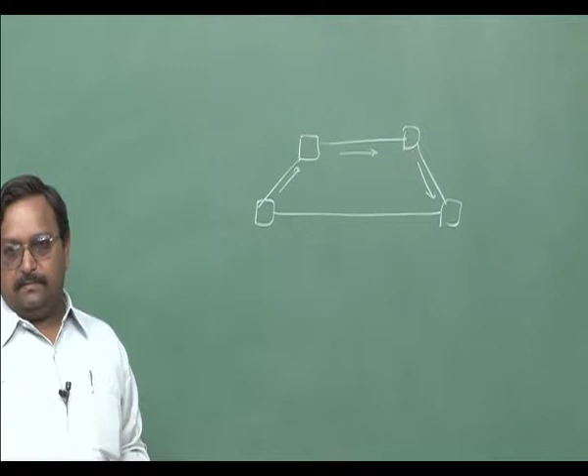So the invite was sent in this direction, and each one of them have added their own via headers. So the first one was added by this, the second one by this, the third one by this. So there were 3 via headers. There is a thumb rule that most of the fields will actually be copied when the response will be generated - most of the fields will be copied back into the response. So this example, I am currently giving an example, later on I will give the specification for the request and response structure itself. There is a formal specification being given.

So usually it will look something like this. This first line in the response will always start with this thing. The first thing will be SIP. Usually it is character case insensitive, but machines are expected to always put capital letters, the way it is done with HTTP also. This is a literal string, it is not a number, while in the HTTP case it is counted as a number, but that does not matter as far as the implementation goes - conceptually that is a difference. They have actually kept a lot of things, borrowed a lot of things from HTTP in this case.

Now there will always be a space, one space, there cannot be 2 spaces. There has to be exactly one space character. So a space character cannot be used inside the strings, that is very important here. If it has to be, it must be escaped.

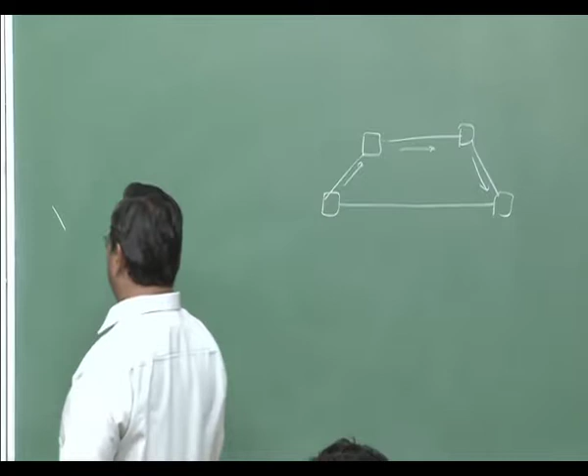Escaping - I think all of you do understand or not. All of you must have used LaTeX at some point of time for your document processing system. So LaTeX has a very nice character, this one, this is a control character. You want to type this character in LaTeX, how will you do that? Is there a way to type this character? How will that be done? Dollars, then here, then dollar - no, dollar is for some mathematical substring. If I want to write an equation, it will go in math mode, it is for that purpose. Suppose I want this string itself to be visible in the text - how will you do that? You are writing a book on LaTeX where you want to explain how to write a math thing. So you have to put this as a character, but the moment you put it, it will write a math equation, A is equal to B plus C, it will write this, it will not write this thing. How will you get these dollars?

You have to use an escaping sequence. So there is a special character which is being defined, which is this. If I put this character just before this, the special meaning of this is lost. This also has a special meaning, so I can also put this. So these are now literal strings. So these two combined together, when they will be passed, you will see something like this.

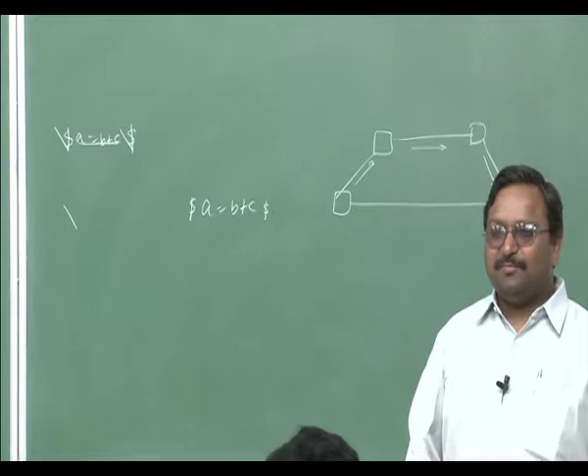This is what is escaping. The problem is when this character itself has to be shown, then I put another backslash, and it removes the special meaning attached with this.

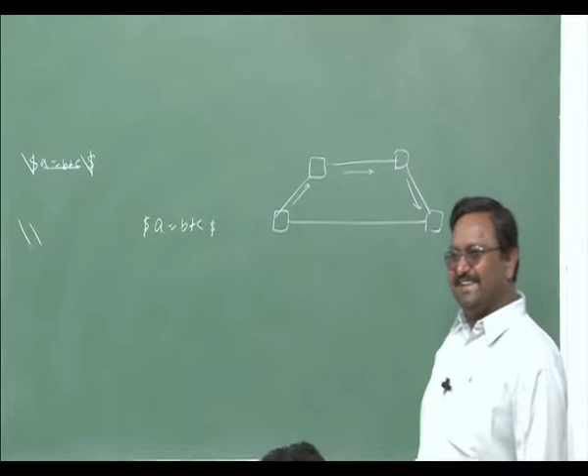This means a new line. No? Yes, sir, this is a new line in case of LaTeX, it's a new line. What you are basically doing is escaping the earlier character, otherwise you cannot print this. I think it's new line. It is not, you check, it is an escaping character, it is not possible. It is being used for that purpose.

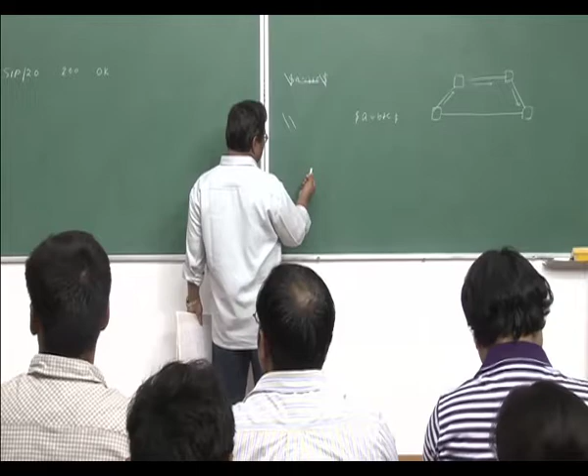Well, a very simple thing: you have math mode, you put something like this, or begin. Begin is typically backslash begin math, something like, yeah, and then... so all these are special characters, they all start with this backslash, that is why it is a special thing, but this itself can be escaped by putting just one backslash before this.

That new line, I think, is used in certain places, I will tell you where, especially if you want to write a text-based configuration file in Unix. So this single backslash is also used for breaking in a physical sense while doing C programming, but actually it is considered as one single line. So one single large line can be broken, and when written into a .txt file, it is written as whatever you are writing, slash, whatever is slash, whatever is slash.

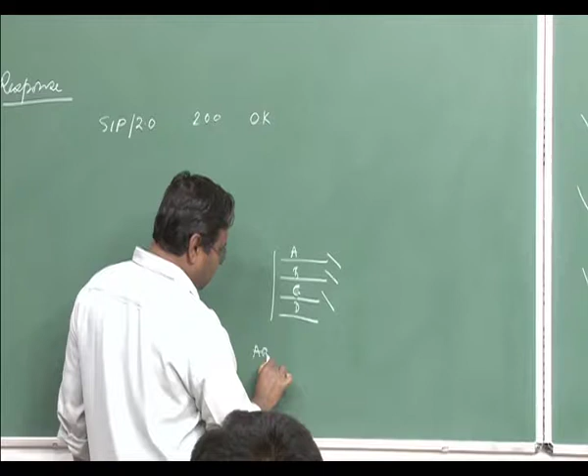Now when the machine is going to parse it, so this is A, B, C, D, it will actually read it as A, B, C, D new line, like this. So sometimes you require this, for example when you are implementing printfs and other things, and lines become too long for the messages, then usually you do it. That is again a common use.

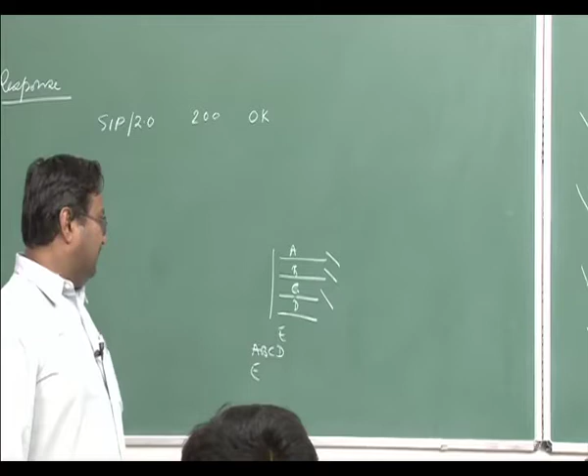Again that is a special character there in this case, but that is within a string. So when you are doing a printf and you have to print this particular thing, then there is again a problem. So you use a printf command and you put this, then there is a problem actually. So if you want to print this itself, you have to again do escaping.

So escaping is a pretty good notion. In fact, in HDLC when I was teaching, I talked about this escaping. So what was that escaping thing which I taught? There should not be continuous ones, because 0, 6 ones and 0 is the start header. 6 continuous ones should not happen inside the string. So I implemented a bit stuffing, that is escaping rule actually. After every 5 ones, I insert a 0. So even if there are only 5 ones in actual data followed by a 0, still I am adding a 0, so that on the receiving side I can simply remove it.

The same rule also applies here. So certain control characters cannot be transmitted in the strings which you are doing, they have to be escaped. Otherwise, you cannot interpret them. This in fact also happens even in your HTTP transport, or in XML schemas, where certain characters actually have a special meaning.

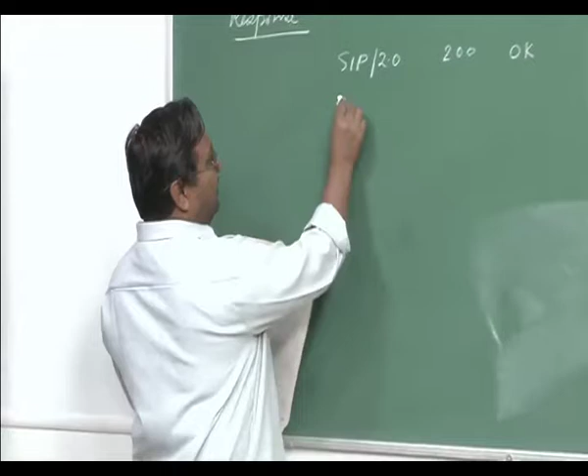So the first field will be this, and as I told you, three guys have already added the via headers, so I am actually putting all three of them.

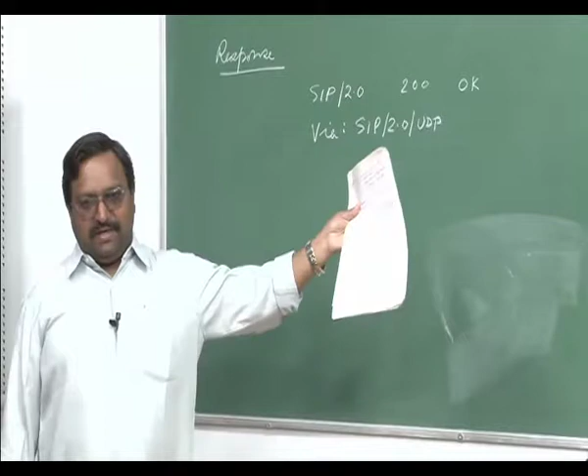Again this header must have a description, as per that format. It says the one to whom you are going to send back the response is a SIP 2.0 compliant proxy. It is going to use a UDP transport, that is what has to be used when communicating back. And the guy who has inserted this, or where you have to send back your response first, is this one.

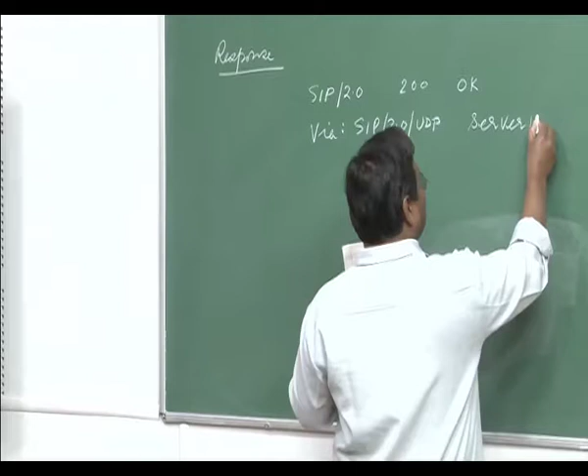So you remember, this one was a SIP server for biloxi.com. So what has been informed to this guy is, when you send the response back, send it to this person, and it actually will remove this particular via field when the response is moved further.

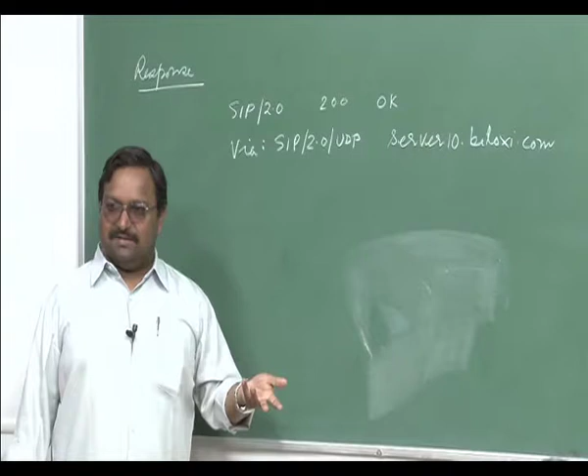This 200 also means okay, so 200 and okay, 200 is for the machine. This is interpreted this way: the first field will always give the version number, it is a fixed format, one single space. This is what will be fed to the machine, or the automata implemented as software or a program, which will understand this and, based on that, the finite state machine will change state. This part is for the humans, the machine will not interpret what is written here.

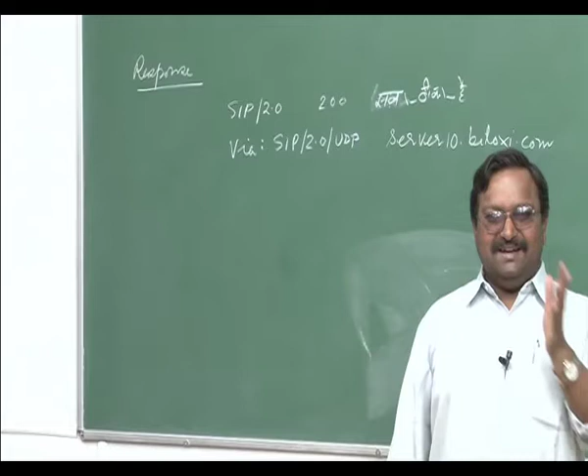You can even write in Hindi if you wish, that is permitted. That is also permitted, remember I have escaped the spaces, and you have to set a header field in this case, which is accept language, colon HN, that is possible. So the machine is not going to read it, so it does not matter.

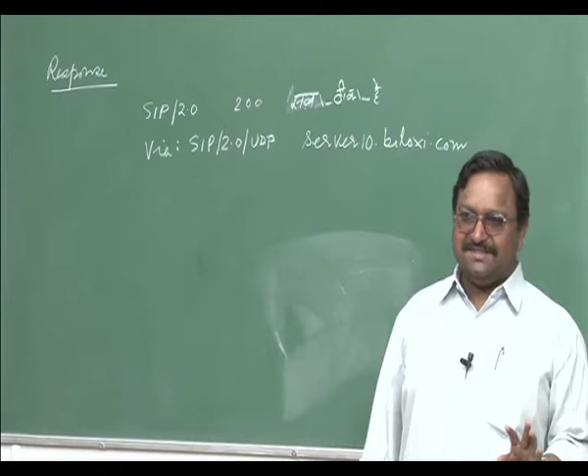For this, it is UTF-8. Remember, all encoding is UTF-8. So any language of the world, almost all languages actually have UTF-8 encodings, which can be used for transactions.

So far I have not seen much of this, except in certain countries where English is not commonly used, they actually do the encoding in their own languages. In India we somehow have been following only English, but Hindi variants might actually exist. SIP servers are not manufactured in India, we mostly build on whatever is open source, and small companies are not focused on the English-Hindi aspect. Most engineers who manage these systems already know English, maybe after 10th class they stopped reading Hindi, and after that everything is in English, but technically the provision has been made.

Basically it is mostly because of China, Japan, Russia, and then of course French and Spanish speaking countries. English is not everywhere, English is not actually a very prominent language, but because the US built most things first, English became prominent. But because it also had to become popular elsewhere, you will always find that everything has two variants, English and French.

Although I think Hindi is the third most speaking, biggest speaking language actually, largest number. Chinese is first, I think, then French or something. French is I think very big, French and English. Hindi comes I think 4th or 5th, somebody was showing me the list, but we still do not have implementations in that.

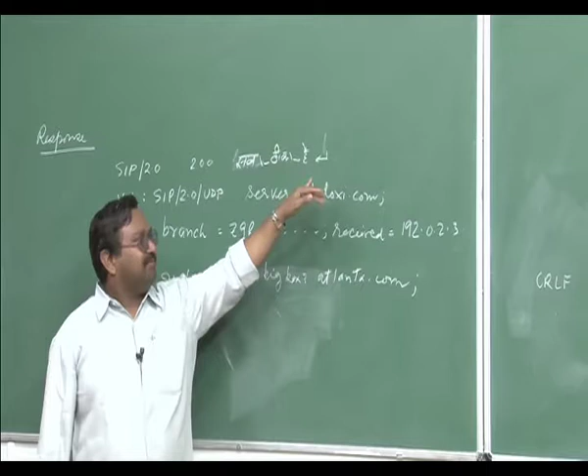Similarly, there will be a third Via field which is added by the sender. This is one single space, not 2 spaces, exactly one space, and that is a specification. The last one will say PC33.atlanta.com. It will also have a branch, some random string, received, and then of course comes the remaining field. So the To field will be copied directly as it is. The To field was, what was it actually earlier? It was Bob, okay.

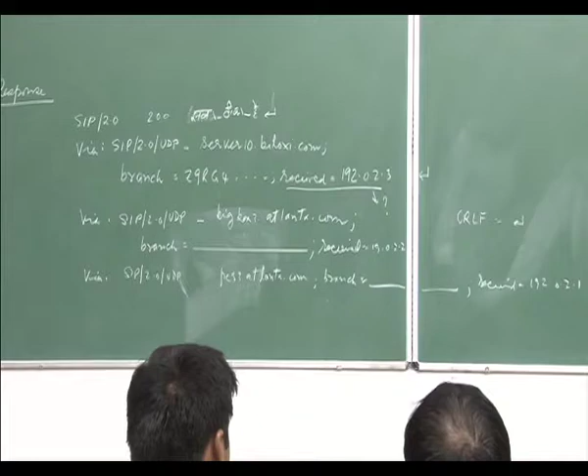So this, I think, whenever I find out, I will tell you, because I don't know how far I will be able to go through the proxy and where it is given. Okay, so let's pick up whatever concept we can pick up. And anyway, if you end up implementing the software, you anyway have to find it out, so you have to read the full RFC and you will find it out. What's the meaning of this? I have not so far reached the specification of via structure.

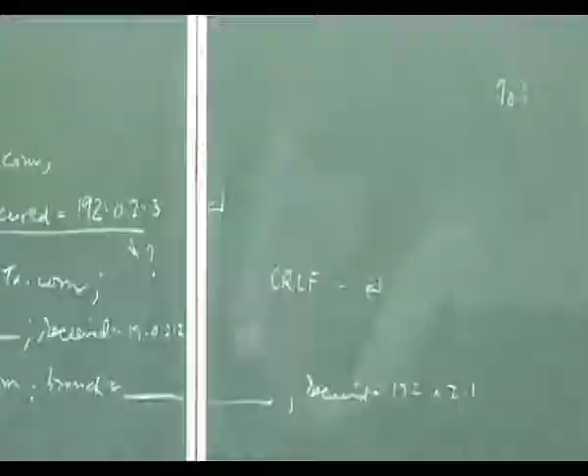Okay, so the field again will contain here, the only difference is rest everything remains same. It's Bob, angled brackets within which your SIP URI will actually be there. Okay, SIP URI also requires all strings to be escaped strings. Angled brackets cannot be used inside the SIP URI, that's very important.

You have to use escaped strings whenever the URI has to be communicated, and you cannot use angled brackets in your email. So for it, I think it's the same way. For example, I cannot have something like this. This email is not permitted because there are angled brackets, since these are usually used to enclose the email ID itself.

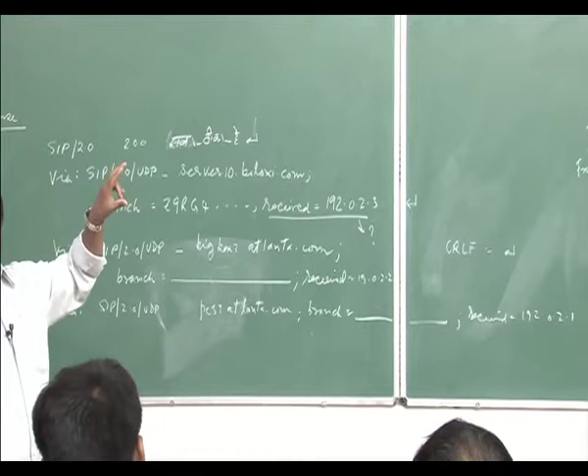Unless record route has also been configured by these SIP proxies. If at any point of time when the invite was sent, one of the proxies says record route and puts its own address there, then that will be maintained at both ends. Bob will maintain it because he receives the invite. The same field will be copied back in the response, so Alice will also receive it. So they both now have to do signaling only through that proxy, because the record route for this particular call dialog has been mentioned in the beginning. Then the bye, when it has to be sent for call termination, has to go through that proxy.

The only problem in that case is if it is a call-stateful proxy, it will not know the status of whether the call is through or not. Usually if it is a call-stateful proxy, these via headers have to be put by call-stateful proxies.

And not a transaction-stateful proxy. Transaction-stateful proxy is a different thing. A transaction happens only between a client and a proxy. So a transaction is happening between these, then another transaction is happening between these.

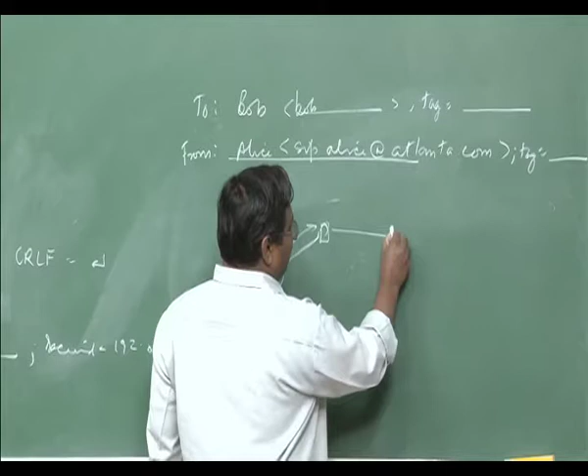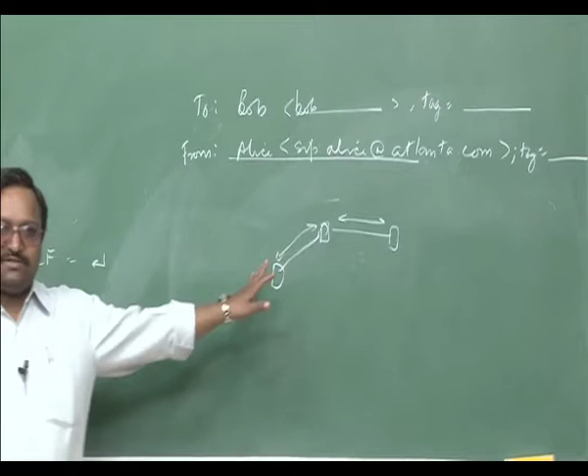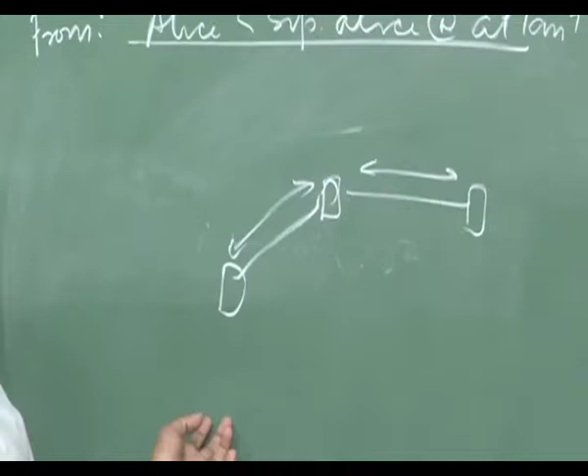Okay, this is a transaction user running here. I'll come to this particular structure. When the response comes back, they keep sending the response back. If it's a stateless proxy, it will not remember anything. Whatever comes is simply forwarded, it does not remember what it has forwarded. When something comes back, it sends it back, that's it. It does only proxying.

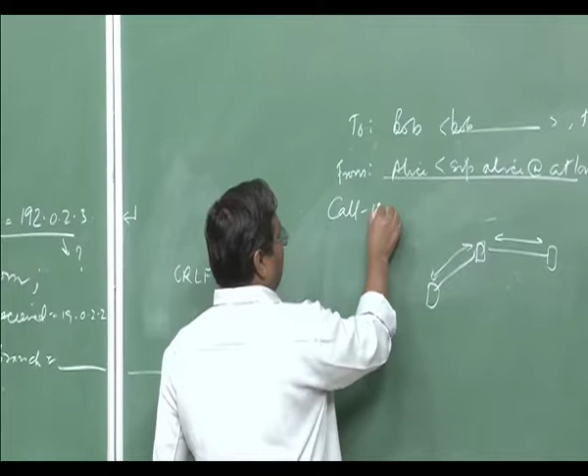So I'll come to the particular figure required to identify this. Then you'll have call ID, this is going to be the same as in the earlier communication, the invite. Remember, this is a response, so there's no method being specified. Then CSeq, this will also be copied from the invite. So there was a method which came, there was a corresponding sequence number. This response is as a result of when that method was executed.

So the sender will be able to figure out the response corresponds to which particular command. When it sends the next command, again the number will change. So if some command gets missed out, it can figure out that it hasn't received the response to this particular command. It got a response for 1, not for 2, but got a response for 3. So it can figure out what commands have not been executed. But all final responses for all commands should arrive back. So this sequence number helps in doing that.

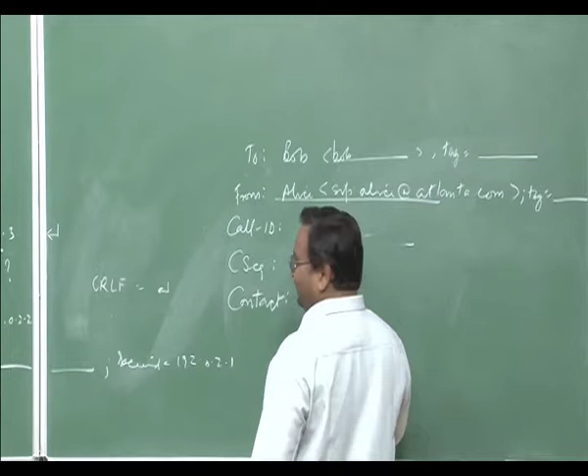And then, of course, this is contact which was not there earlier, this is now what will be added. This will be telling that this Bob, this will not be Bob sip:Bob@biloxi.com. This will be where he is actually currently staying, his current location. This is where the peering will be done.

And interestingly, SIP is not the only URI for telephony. There is a TEL, tel URI, which is also used by a lot of people. So SIP can also be used to carry not only SIP but tel URI as well. But then how those will be interpreted is a different question.

So in this case, 0.2.4, now I think from here I can get it. What has happened is this IP address has to be of the proxy. From here I can guess this is not the one who is giving the answer back. This is for the proxy. So it's only telling that when I received the packet, I received it from this particular IP address, when it's sending the response back. And it's responding back to whatever IP address will be resolved from here.

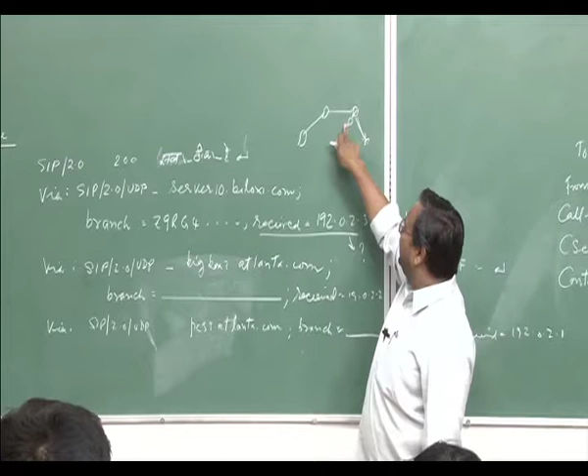So it's technically possible that there's another machine running here. So the invite comes in, this invite was received from here, and this has put a via entry for this particular one, another machine sitting in the same domain. So it will send the entry here, response will be sent here, a different machine, because when the via entry was done - server 10, server 1, server 2, server 3, server 9, server 10 - the invite was received from this IP address, but the response has to go back to this. That's what it actually means.

And this same thing is being copied back, this is a copied back stuff, remember. Only this thing was added depending on from where you received the invite request. I think that's what the interpretation should be, there cannot be anything else now. Again, my interpretation is that only to avoid the lookup, they are adding the IP address, because if that has to be done, then even this is not required.

You just put the via field, then it should be there, because if you remove this server proxy, again you're not giving the IP address. So what path do you have to do? Again you have to look up from the DNS. You look up, but to avoid that lookup, you can put the IP address. That's the only reason I can figure out.

But then in that case, why did this need to be added back? That's the question. This guy who is sending the response back already knows from which IP address I got it. This IP address is of no use to this guy. No, this guy will send to this proxy and then will remove this. But why does this need to be added? Only for Bob - Bob has already, when he got the invite, at that time he knows what is the IP address. When you're sending these messages for this guy, it's a response.

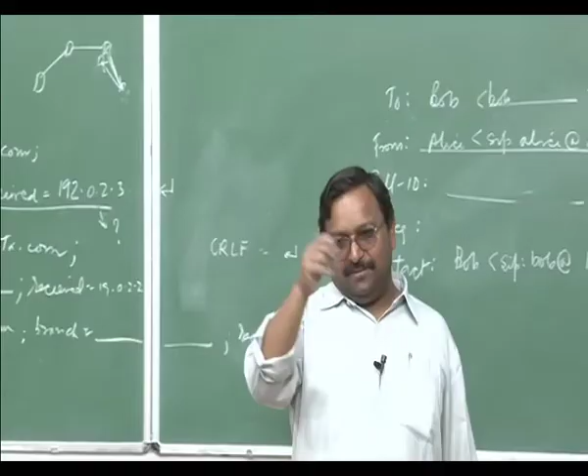And when proxy is sending, this must be this IP address. IP address they have just put it, it's actually 192.0.2.1, 0.2, 0.3, 0.4. That's what must have been done in the RFC. Even these namings are also so that people can understand. They should not misunderstand this stuff. They can make out lot of things through this mechanism. So I think this must be the reason.

Okay. So this is the fourth IP address, which now even clarifies that. This is the contact. Now pc33.atlanta.com corresponds to 192.0.2.1, which is this particular client, where Alice is there.

And then of course I think rest is all straightforward. Contact type, this dot 4 is of Alice, sir. Dot 4 is for Bob.

Which one? So this Alice contact is not being copied here. Alice contact came from that side. Yes, 2.4 Alice's contact comes from the different side. Remember, so this 2.4 is of Bob, is for Bob. It's a contact of the guy who is sending the response. That was the contact of the person who sent the request.

Okay, this to and from field is not for the response, because the response is not going back to Bob, and it is not from Alice. So that can also be one of the confusion.

This talks about the invite message. This is corresponding to the invite which was sent from Alice to Bob. Yes, response to this, and this specific response is originating from this contact. So contact is the one from where the things are originating. 200 is also specific, that it is a response to that. Yes.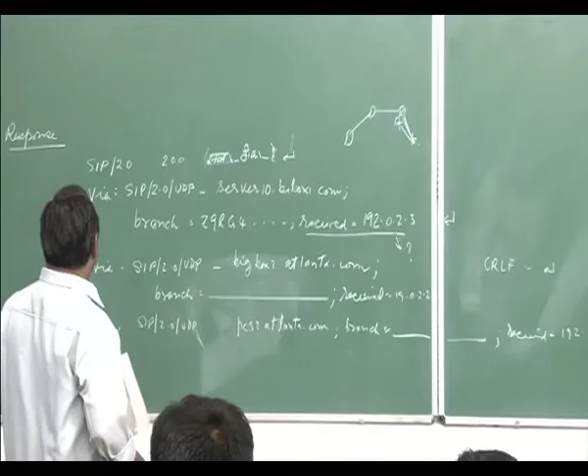You can try this for HTTP, I think it should be possible for this too. Do a telnet to port number 80 of a web server, do not do SSH. Telnet, and do not give a username, it need not be given. Telnet to a machine on port 80, you can even specify the port where the telnet has to be done. By default I think it is 23 for telnet, FTP is 21. Most people do not know that they can change the port. So they do telnet space and the machine where they want to login, but telnet is not a secure protocol, it is a clear text transport, and then you can specify port number 80.

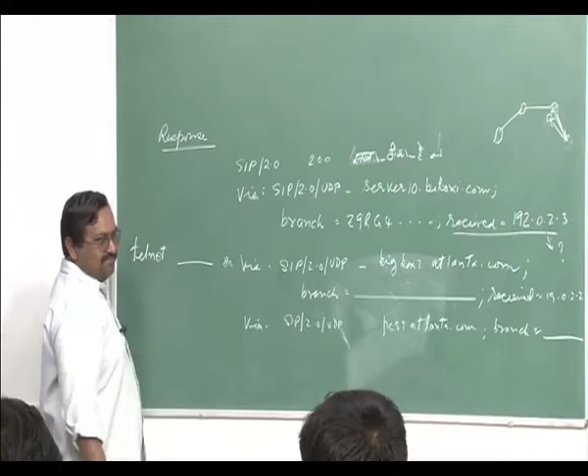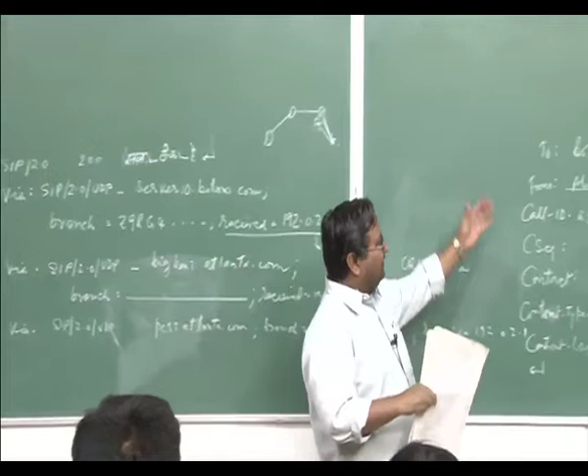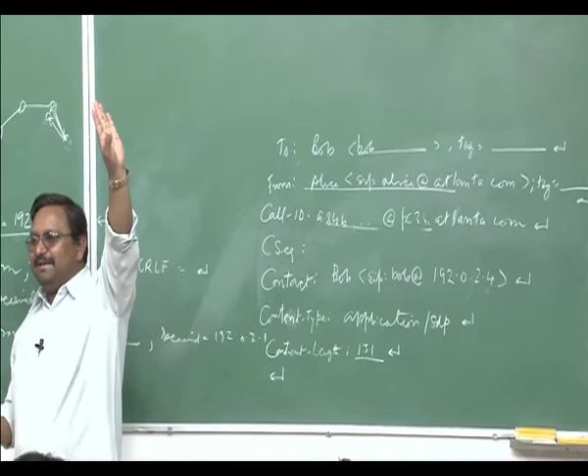So you do a telnet to a proxy, a TCP connection will be set up, and it will not ask for login password because there is no challenge in that. It is not a telnet server running on the other side, there is no telnet daemon on port 80, it is a web server, mostly Apache or maybe something else. Then you will see suddenly a line, and you will write GET, whatever is the first command, you just type it out, nothing will happen once you press enter. You have to write down all the header fields, and only when that final enter is made will the header be interpreted by the machine on the other end.

Because what is happening is, technically for HTTP I am creating a byte pipe, which is a TCP connection between two machines. As you are pressing characters, there is an algorithm used to keep waiting for a certain number of characters, then it will be put in the frame and transported. This will keep receiving characters, but will not start interpreting until it finds two CRLFs together. When it figures out there are two CRLF fields together, the header is finished, now let it parse it, and after parsing it will figure out how many characters it is supposed to receive after this, then it will keep receiving those bytes, and then the HTTP request is all over.

Because mostly HTTP is now using persistent connections, the same TCP connection can be used for another HTTP request. In earlier days of HTTP, for every HTTP request there was a separate TCP connection, response comes back, TCP connection closed, and for the next one you do the same thing again. So persistency was implemented later on. It becomes pretty fast, you only have to do the TCP connection once, so that overhead was actually removed.

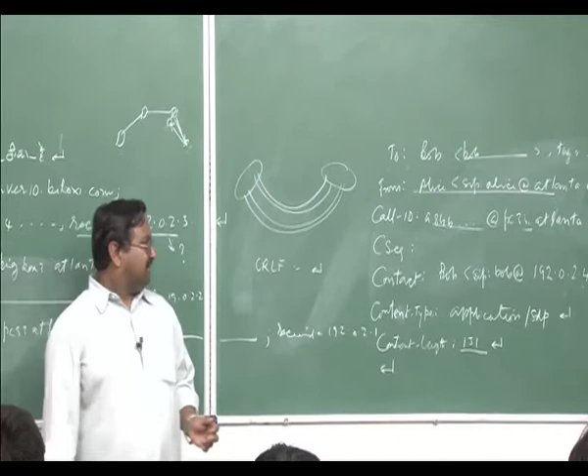So the same concept is also used here. This 131 is the SDP length, the length of the content which will start from this line onward. If it is 0, there is nothing after this, this is the end. There is no end of file character in your Linux systems, mostly it is based on Linux, so there is no end of file character. Microsoft's earlier file systems, I think, were actually using an end of file character at the end of the file. Here, purely it is based on how many bytes have to be read from the beginning, so it will read those many bytes and the file is over. So structurally it is the same actually.

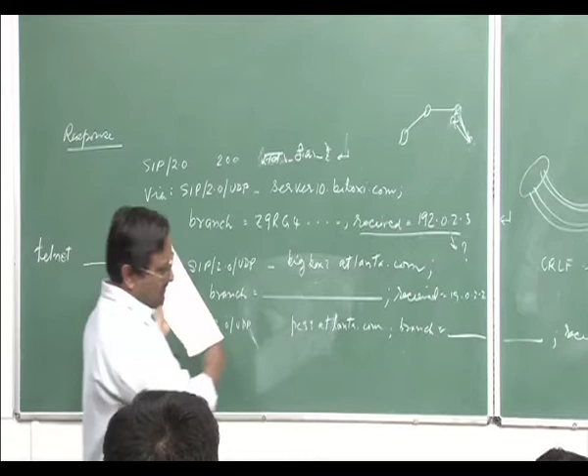So this is what will be typically the response. Let me quickly go through the complete transaction. For example, now what can happen is this guy is sending... first there was 100 which was coming, trying, this also will receive 100. So when the invite was sent, this can actually send something like 486 also. I am just giving an example, it means busy here.

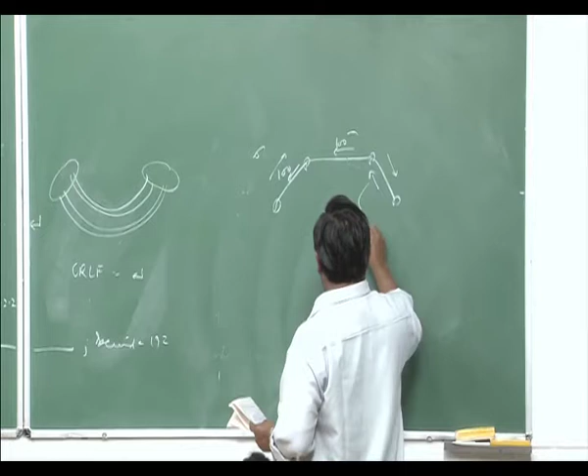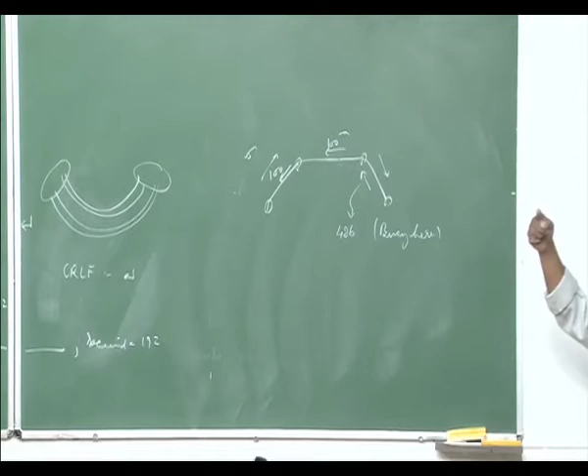This is one of the codes. I will specify which particular 1xx is for, 2xx for what, 3xx for what.

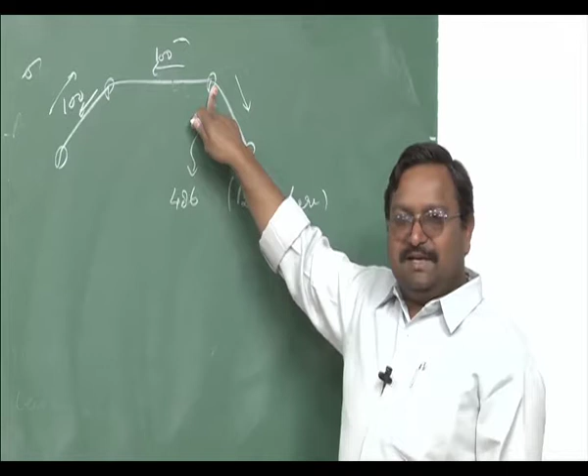Now, this 486 is not received by this person, this is sent by Bob, because Bob may be talking to somebody. In that case, this proxy can decide that I can now try making a call to a voicemail box. So this will typically be used for those kind of applications.

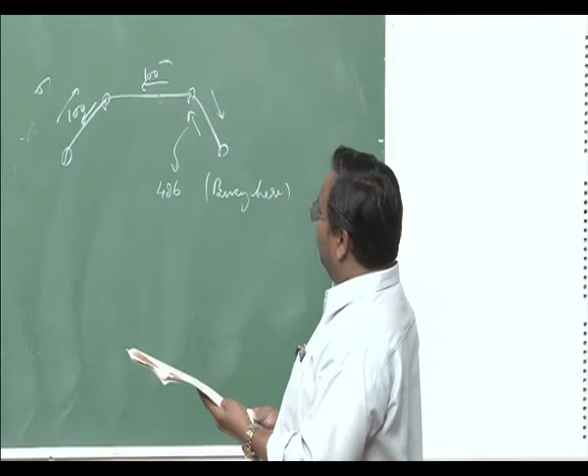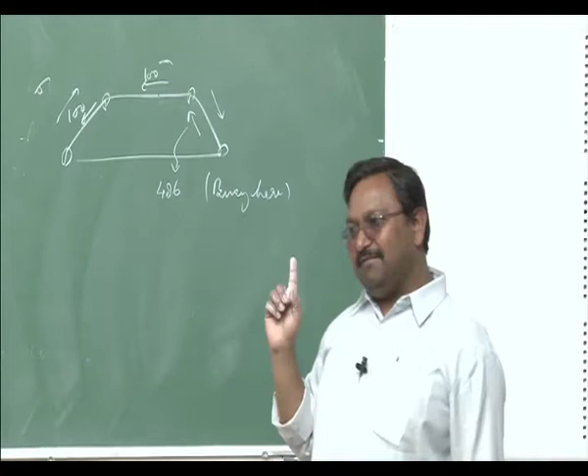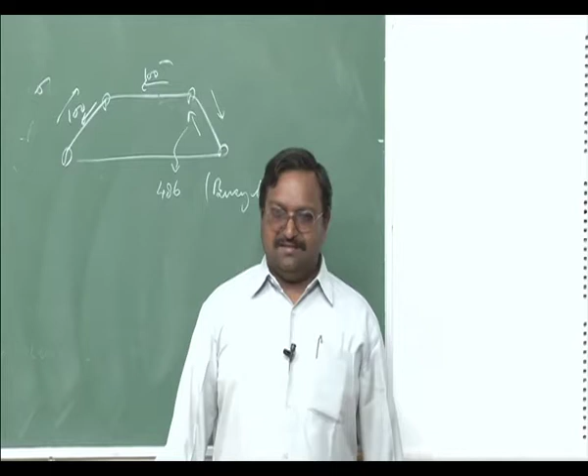And this new invite need not be sent via proxies, this can be peer to peer, that is important, unless that record route thing is being configured in the beginning. And then of course, it can send 488 which is not acceptable, that is what is the meaning.

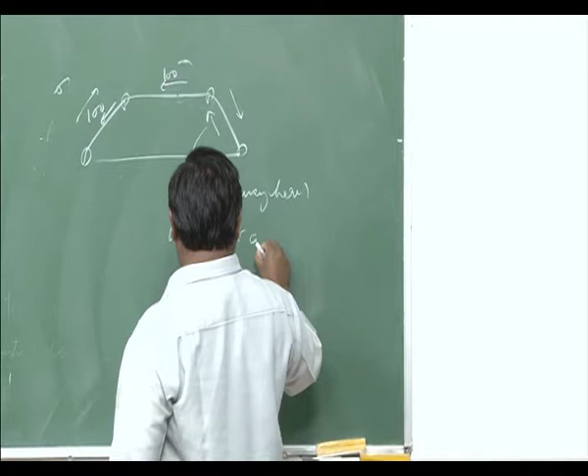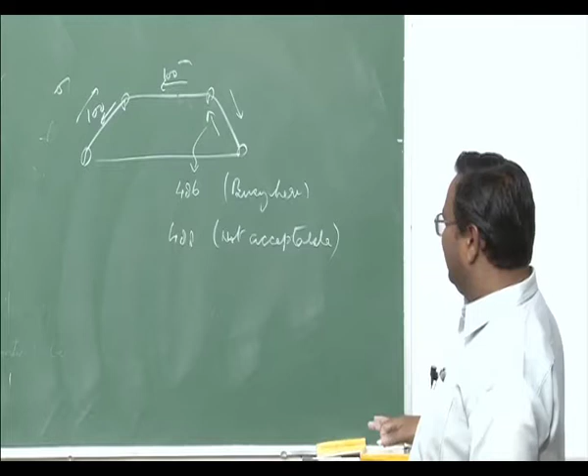Remember these strings are application specific, these are not hard, this can be rewritten by you, machines will understand only these codes. There is only an interpretation of that for the humans. So you can write it in Hindi, it is okay. So these are not sacrosanct, these are sacrosanct numbers.

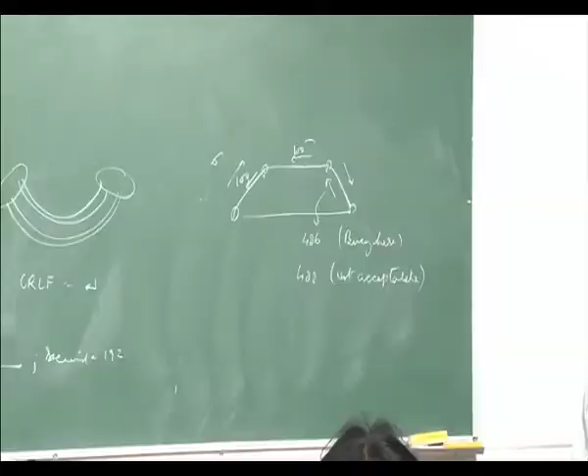So if this comes, the call will remain with the older whatever agreement which they had. This typically happens if the bandwidth of this channel improves. There is a bandwidth estimation, bandwidth becomes better, you can say go for a better codec or better quality video, for example. You can again agree, but the other guy does not have the capability, or bandwidth goes down, then you can downgrade yourself. So you can keep on negotiating on that basis, but remember media transport is separate from the signaling. If this fails, the previous negotiation remains valid.

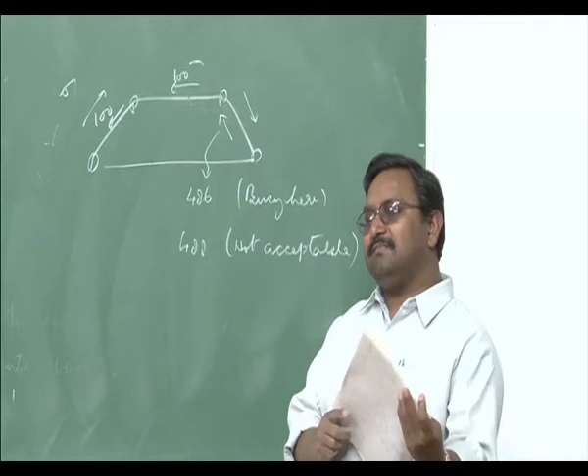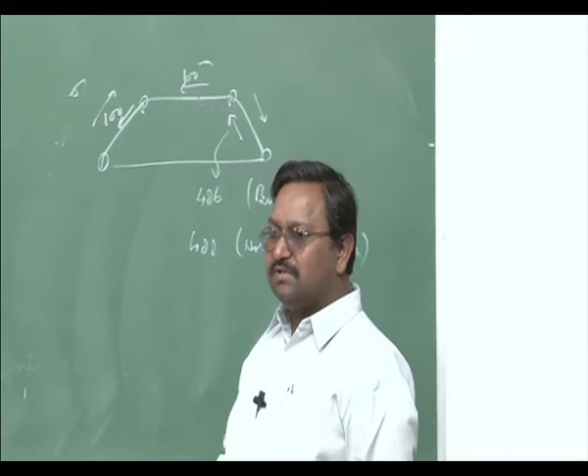So I think after this we have to look at the layers, how you will organize this whole concept into layers. I think we will discuss that in Monday's class.

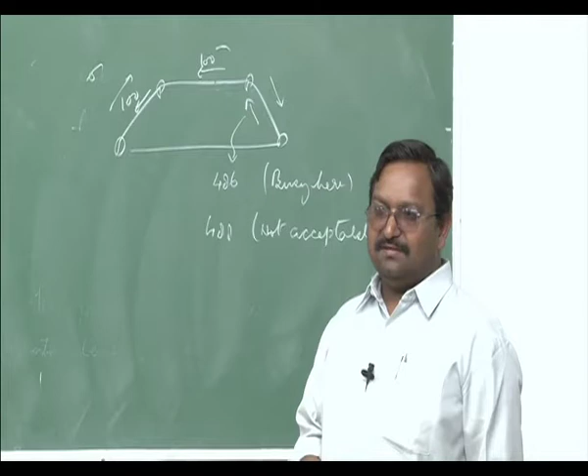So any other question? Who decides we have to do the record route? Proxies can decide. Usually what happens is your telecom operator with whom you have registered, your domain name server, it will usually tend to say I will always be involved in whatever signaling you do. I will not allow you to do a direct thing.

But of course, if because both endpoints have the contact, they can override if they wish, but they are not supposed to as per the standard. It's only for the signaling part. It is only for the signaling path, not for media.

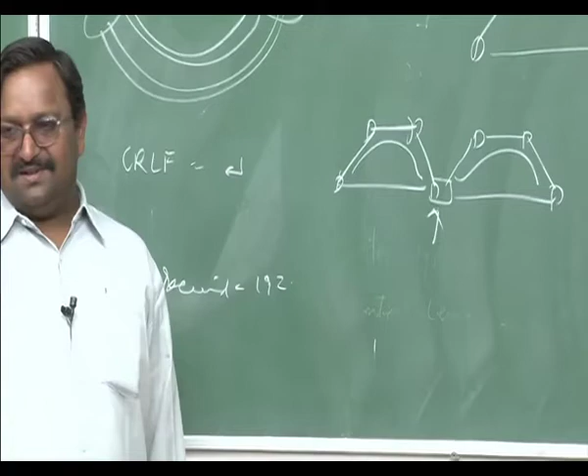If you want a media proxying or media gatewaying in between, you will first of all create what we call back to back, you will create two trapezoids in that case. That is typically the structure. This is your media gateway. So signaling happens in this fashion. That could be one option, and then media goes in this fashion.

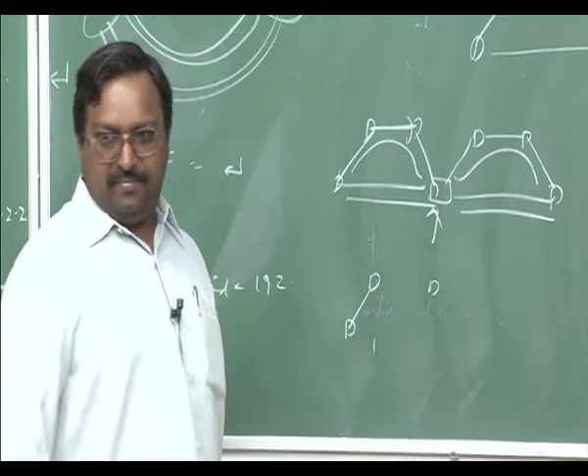There is another way of signaling. This guy wants it to go through the media gateway, or maybe there. So it will actually have a media gateway, it will do the signaling to this guy, then it will do a signaling to this fellow. It is now doing a tricky thing, it is now telling him that this is the end user and making him peer with him, and on his behalf, now this is a media gateway control, this is Megaco or even this can be used, not an issue. And for him now it is peering, and then there is a Bob, and Bob will start peering with this. So one signaling path is this, the other one is between these entities.

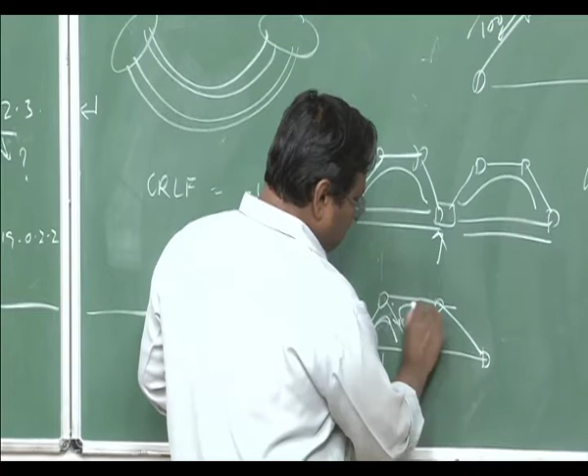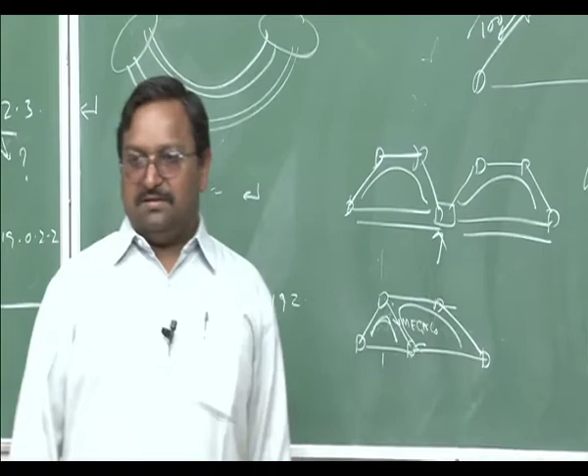That is another way of doing it. This is what we call back to back user agents, B2B UA. So you have a user agent server here, user agent client here sitting, and they are back to back funneled together.

And you can also build up tricks, for example, for signaling you can have B2B UA, but you might do media transport directly, that is also possible.